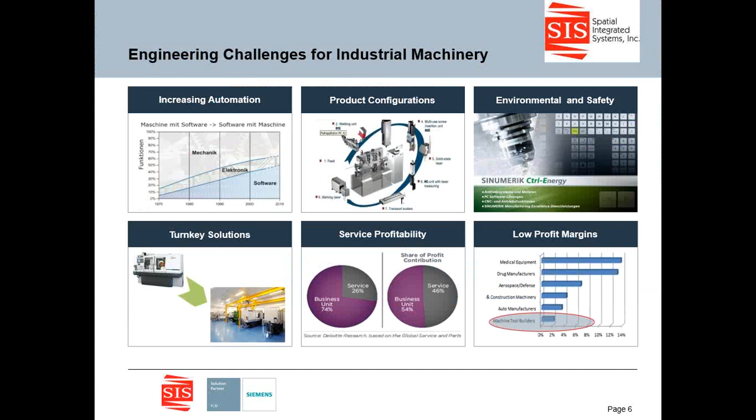I'm also going to touch on service. Manufacturers of goods in every industry except their own are pushing manufacturing providers to be full service partners. They realize this presents a large profitability opportunity to help offset the low margins that already exist in the industry today.

Now we're going to talk about key simulation-related trends in your industry. What does complexity mean in industrial machinery? Let's look at modern manufacturing machines and how complex they are to develop today. Increasing product complexity in industrial machinery is so difficult now. From sensors to mechanical design to motion controls, there are many diverse requirements that modern machine builders must have at their fingertips while designing simulations and ultimately commissioning the machine.

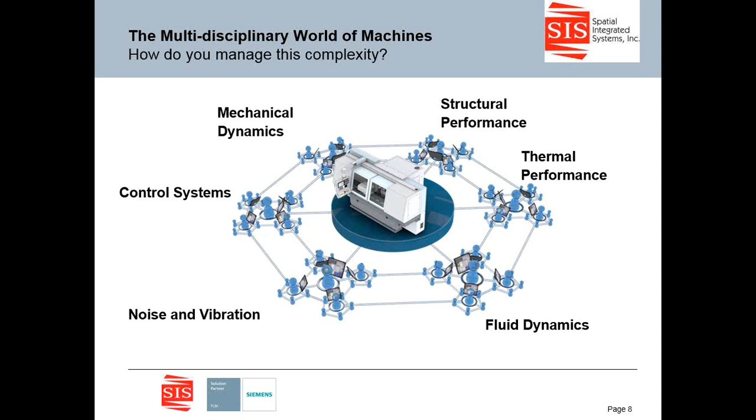Speaking of complexity, let's talk about the multidisciplinary world of machines. Engineers need to consider various performance aspects of the machine they are developing, such as structural, thermal, noise and vibration, how moving parts will interact, and how fluid and hydraulic systems will perform. But these areas do not act independently of each other. It can be challenging to understand how thermal performance will impact structural performance, for example. As a result, relying on building prototypes to physically test new designs is too costly and impractical nowadays.

Now, what is the possible solution to these challenges? I love this animated picture because it demonstrates the moving parts and complexity of simulation design, the virtual simulation of the entire machine to optimize design and improve validation earlier in the process. To overcome this, machinery developers are looking to establish a collaborative, parallel, multidisciplinary engineering platform that involves simulation earlier in the development process.

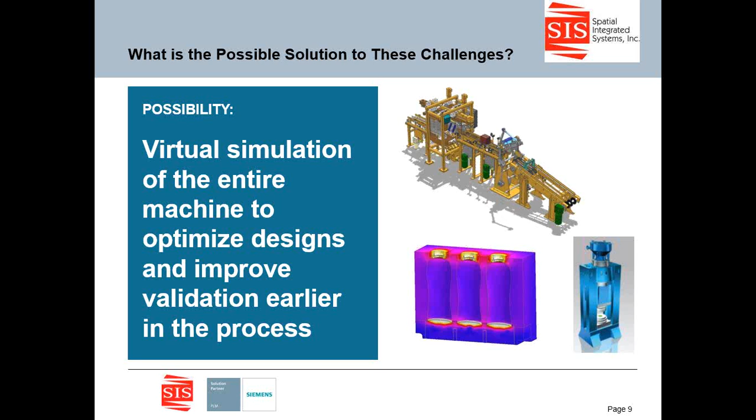Now, of course, we always have one question: one possible solution for simulation and verification. What do you think that might be?

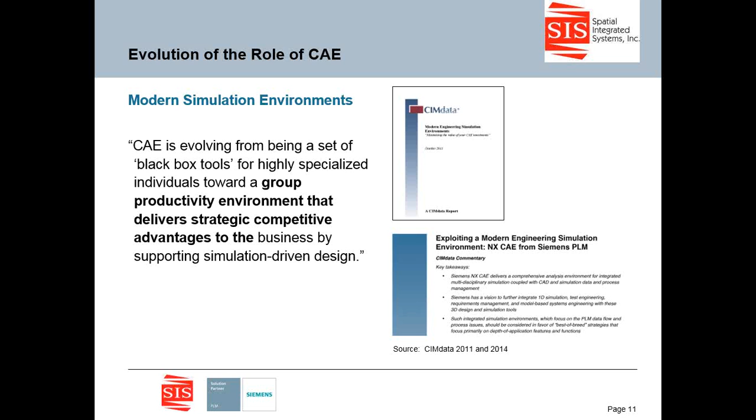Here we actually have a study from CIMdata. They're marketing research analysis, I'm sure you've heard of. They collect a lot of data to figure out what simulations look like today and how they can be improved. I'm going to read this to you, what the report actually says: the CAE is evolving from being a set of black box tools for highly specialized individuals towards a group productivity environment that delivers strategic competitive advantages to the business by supporting simulation-driven design. That sounds very important when it comes to the CAE evolving.

Now, here are four different elements of a modern simulation environment. We have integrated geometry and analysis modeling, which bridges the gap between CAD and CAE modeling. It delivers significant productivity benefits. Then you see multidiscipline simulation and optimization capabilities, all interconnected and available within a single user interface.

A third one is system-level modeling and simulation capabilities to evaluate the system-level performance, which is very important. And the fourth and last element is simulation data and process management, to more effectively manage and keep track of your analysis data, requirements, processes, and workflow.

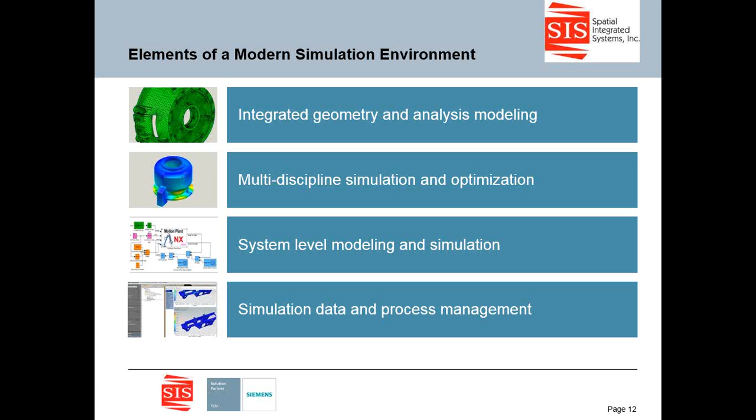Now we're going to shift gears into NX CAE and do the breakdown of everything. I know you're all very familiar with this and you've seen this before, but I'm going to summarize it as a whole. One of the great examples of modern simulation environments today is NX CAE. CAE is a modern, multidiscipline CAE environment for advanced analysts, work groups, and designers who need high quality performance and insight in a timely fashion to drive product decisions.

CAE provides the ability for greater simulation-driven design processes by giving companies the ability to expand simulation to the design community and increase collaboration between high-end analysts and designers.

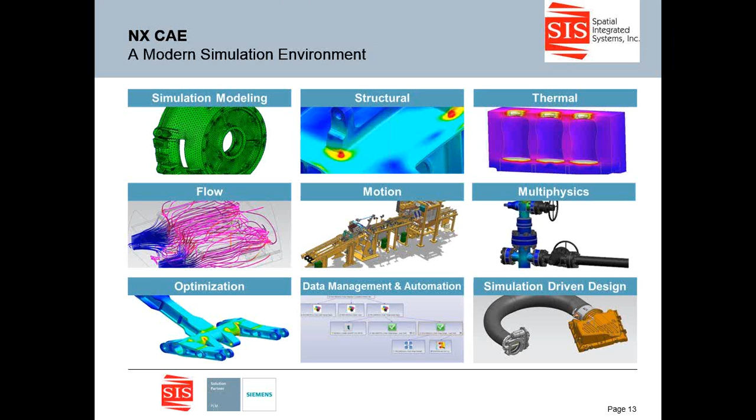Let's go over the traditional CAE process. As you see illustrated, this is the way the traditional CAE process is done today. As you can see, it's very long, it takes a lot more time than it should. I'm sure many of you are very familiar with this.

Based on the process, which starts at the part in CAD, CAE analysts spend over 80% of their time just modeling the part for analysis purposes. How bad is that? So why does analysis modeling take so long?

It can be broken down into a number of steps, which can take various amounts of time depending on the type of model to be analyzed. Analysts spend a significant portion of the time cleaning the geometry to remove sliver surfaces altogether. You also spend time mid-surfacing, creating fluids, and partitioning solid models for easier hex element meshing.

The frustrating thing is that the entire process is repeated for every single design iteration. It can be very hard to reuse the previous analysis model using today's CAE tools.

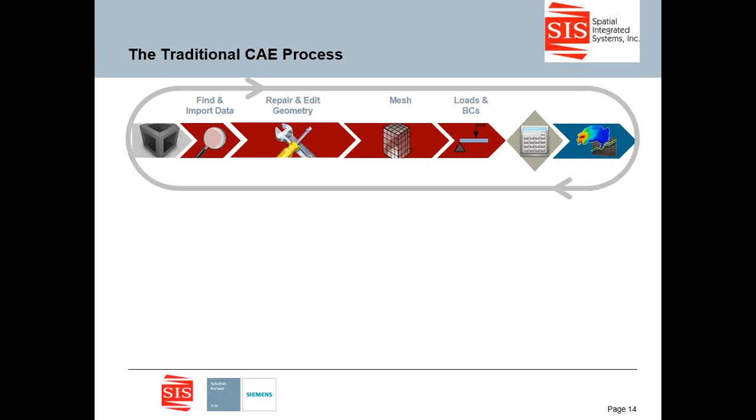Let's see the difference between NX CAE and the traditional CAE. As you see here, the chart shows the long, endured process of going through the traditional CAE. And what's great is that with NX CAE, you're able to break that down with faster initial iterations, which gives you rapid updates for later iterations. So instead of having that long process you had before, we can break that time down to where you're not having to spend so much time on it.

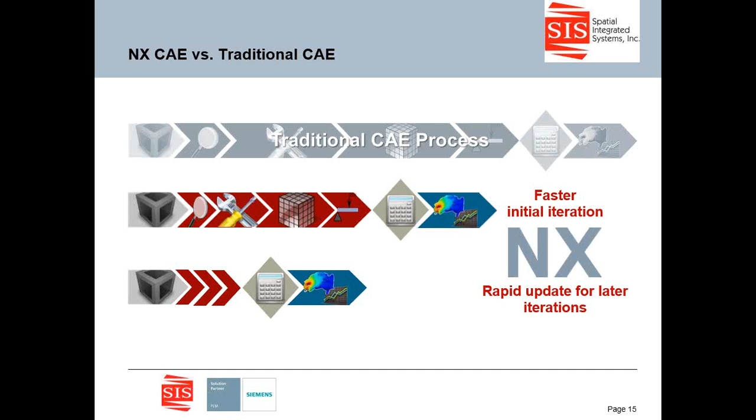Let's talk a little bit about leveraging geometry for faster CAE analysis modeling. Referring to the productivity benefits that analysis can achieve through a common geometry in the interface, integrated geometry and analysis modeling is used. All geometry edits, mesh, and boundary conditions created by the analysis are associated to the design, which allows engineers to rapidly update their models when the design changes, providing much faster results.

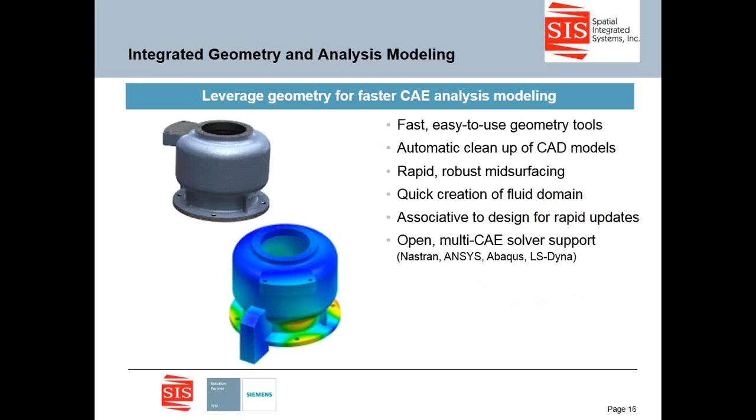Let's dive into the broad range of physics simulation solutions in a single environment. Multidiscipline simulation means that multiple kinds of simulation capabilities are offered from within a single environment. CAE combines multiple analysis domains under a single user interface, which is so helpful.

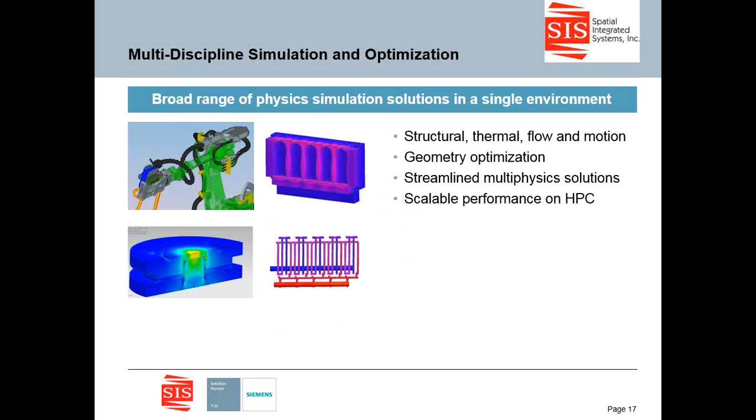One key enabler to the system simulation of CAE is the ability to effectively build and manage large analysis models and assemblies using a multi-level structure, very similar to how CAD assemblies are managed. This concept is very unique to the CAE world. With traditional CAE tools, engineers must manually build single large assemblies.

CAE can offer significant time savings in simulations to engineers. When you increase the number of processors, as you can see in this chart, your solution speed up goes up.

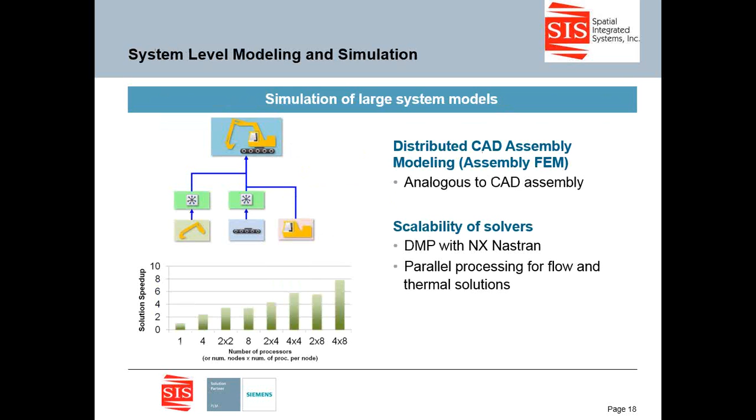NX users directly access data stored in Teamcenter and push analysis modeling and results back into Teamcenter to facilitate sharing with other engineering groups, sites, or even suppliers.

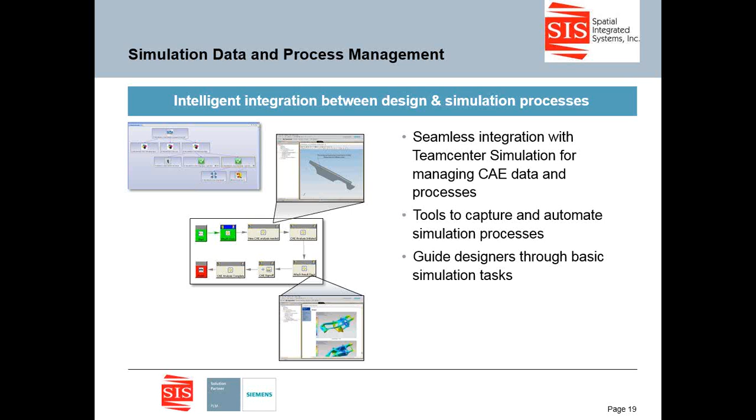Now we're at the time where we're going to go over a summary and have a couple case studies so we can at least put in perspective how this can help you.

So in conclusion, CAE is specifically designed to meet today's simulation and product engineering communities' needs. It enables you to move simulation further upstream in your development processes and make smarter decisions to help you deliver better products.

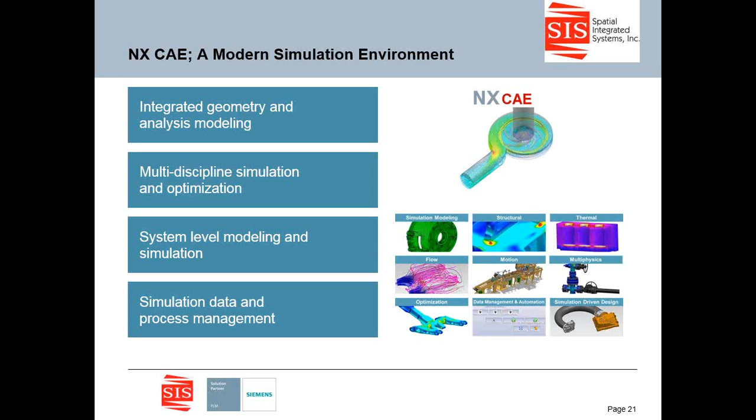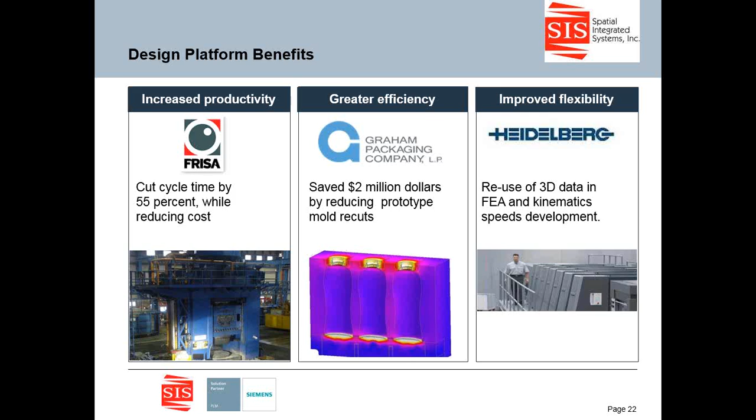Now for a roundup for SIS, these are just some of the few things that make us a great partner for you. We are a dedicated company that has, as I said in the beginning, 20-plus years in engineering and maintenance support, alongside reverse engineering.

Our customers are always our first priority, whether it be training on-site or off-site, or even maintenance calls to figure out what's going on, or any technical support questions you have. We service our clients to a gold status, making sure they're our first priority and that they're happy and want to continue their software with us.